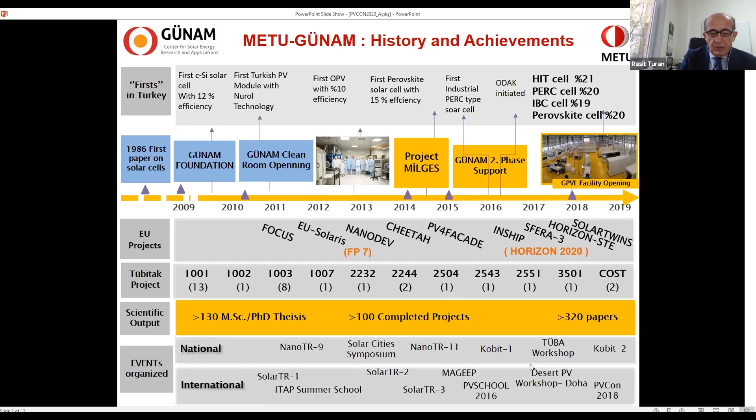And we have now come to a new stage, which we call new GUNAM. A new status has now been authorized to us under the law number 6550. Now GUNAM has been recognized as the Turkish National Center on Solar Energy Technology. This is a kind of recognition by the state.

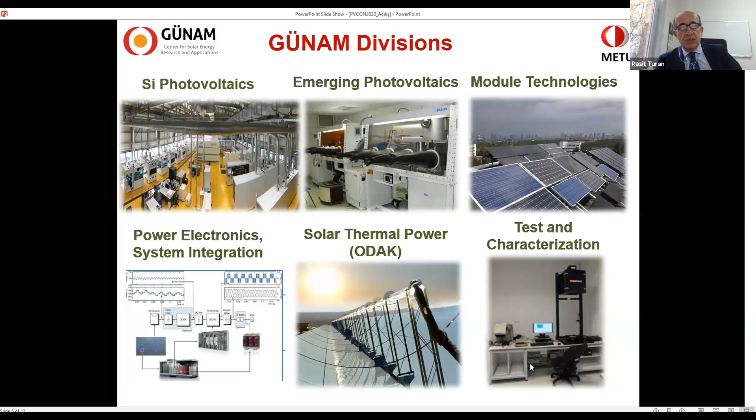Okay, here are some pictures from our divisions. Silicon photovoltaics is maybe the strongest one, with the highest number of people working and the largest infrastructure. And also emerging photovoltaics is a very productive unit in our center. Module technologies is starting now. Actually, we have a very good outdoor test platform under this group. The power electronics group is also starting up with equipped laboratories and also people. And solar thermal power is operating together with the mechanical engineering department of the university, and we have a strong test and characterization unit.

Okay, we will have 2 major buildings, 2 major facilities. One of them will be in the so-called METU Research Park building. Here we will have a new clean room with 500 square meters of active laboratory space. And this part will be connected to the other research centers at METU.

The other one is a unique R&D based structure, which is a kind of pilot scale production line. This facility is fully operational now. We can fabricate all standard silicon solar cells, including PERC, aluminum BSF, bifacial, IBC, etc. So this facility is open to industrial research.

Another very important initiative we have taken very recently is to set up a new platform in Turkey, which is called Turkish Photovoltaic Technologies Platform. This platform will be supported by the government, by TUBITAK, which is the major funding agency in Turkey. In this platform, we will have industry as well as some other universities.

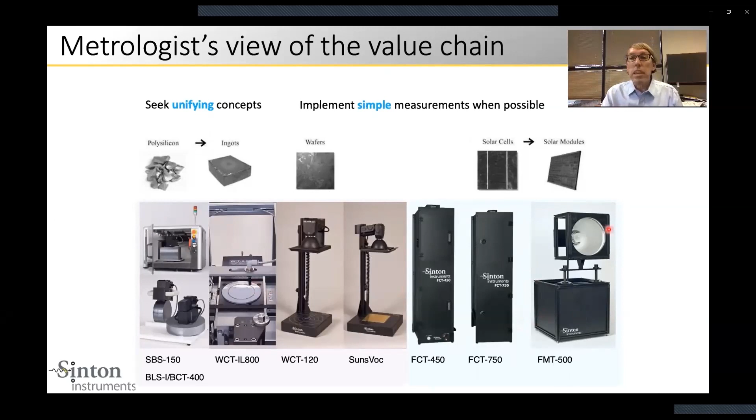In the beginning of the process, you can qualify your material for material quality, for purity, for crystalline quality. During the process, you can monitor your wafer lifetime to see if you've had a contamination event, or to optimize your passivations and make sure that process control is under control. At IV test, you can measure the entire characteristic of the solar cell and basically know what your process control was in the line after all of the high temperature steps. And then we have module testers as well that can qualify the modules right before they're sold.

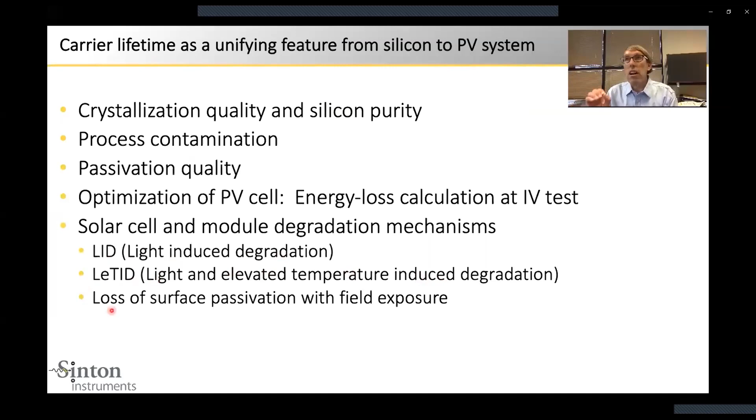So carrier lifetime is a unifying feature in the PV value chain all the way from beginning to end. In addition to these features, at the IV test, you can do energy loss calculations and figure out how to re-optimize your solar cell design or process. I'm going to talk a little bit about solar cell and module degradation mechanisms because lifetime is a very good way to study these as well. There are three main ones: LID, light-induced degradation, which is boron-oxygen pairs; LETID, light and elevated temperature-induced degradation; and then the loss of surface passivation with field exposure.

So first, we'll talk about lifetime from first principles. What we're talking about is the lifetime of an excess electron hole pair in silicon. And this is usually determined using the continuity equation, which was in even the first textbooks on semiconductors by Shockley. And the lifetime of the electron hole pair is equal to the carrier density in the wafer divided by the photo generation minus the carrier density as it changes with time. In the steady state, it's just the carriers per unit photo generation, and this is what it would be in a cell or a module being used.

And in a lifetime test under transient conditions, it's the carrier density over the change with respect to time of the carrier density. So what we can see from this equation is that what you need to measure to determine lifetime is the carrier density as a function of time. And you can do this with a number of sensors, and people do. One of our favorites is the eddy current sensing of conductance, and then you convert to carrier density using mobility.

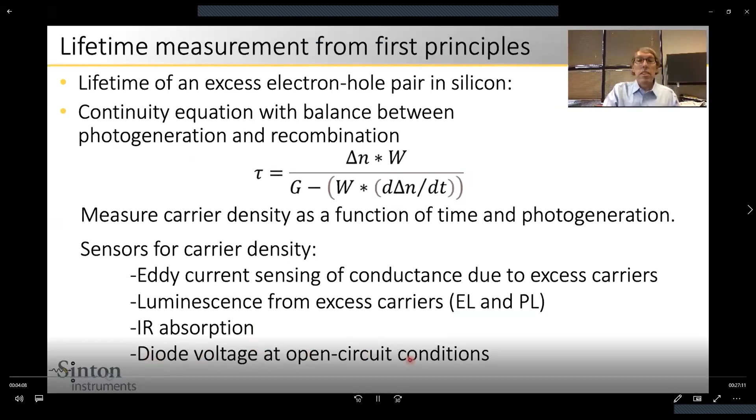You can use luminescence from excess carriers, EL and PL, and this is just looking at the NP product in the cell. IR absorption, the free carrier absorption of free carriers, tells you how many there are in the cell. And finally, after IV test, you can use the diode voltage under open circuit conditions. In this talk, we'll be talking mostly about eddy current sensing of conductance and using the diode voltage.

Now, the first and the most common application for lifetime testing is in the process line optimizing the bulk lifetime and the surface passivation. And this is often done with a wafer that has surface passivation on the front and the rear. It's measured on a lifetime tester. And when you take 1 over the measured lifetime, you can separate that into 1 over the bulk lifetime plus the J0 with a constant, which depends on the carrier density delta N, the excess carrier density.

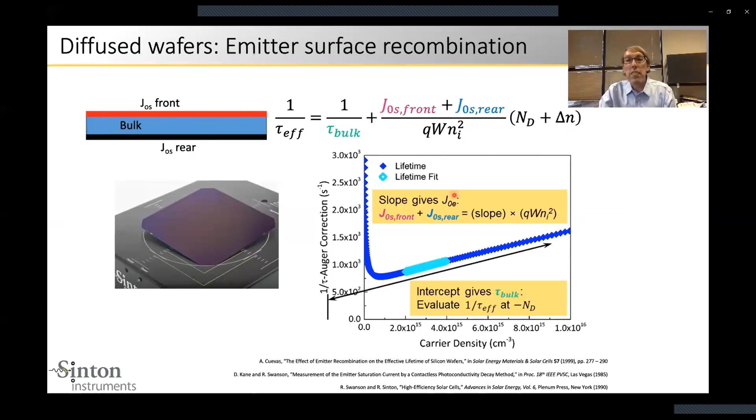So this is the slope. If you take the slope and correct by a constant, that gives you the J0 of the surface, and the intercept at the negative doping gives you the bulk lifetime. This is an analysis that you can do on most N-type wafers, especially undoped or lightly doped N-type wafers, and it's the most common application of lifetime testing.

Now, just to generalize this a little, you can do the lifetime versus injection level as a function of temperature. And this gives you access to much more fundamental parameters. There's a lot of research, especially in the last 20 years or so, with actually identifying the trap level and the ratio of capture cross sections in order to get a fingerprint for various defects like iron or chromium in silicon, boron oxygen defect, and these other things. And by using temperature, you can get a much less ambiguous determination of these parameters.

And I'm not going to go into detail of this. It's better done by others, and if you want, I can give you references. But I will mention some of the applications for the degradation mechanisms, and I'll just use the LeTID in PERC structures as an example.

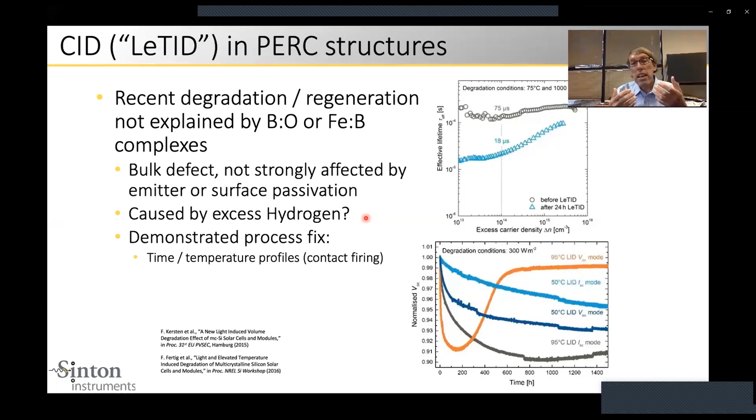And the leading hypothesis is that this is caused by excess hydrogen in the silicon, as well as some other aspects. And there's a demonstrated process fix for this, which is just to control your firing temperature, in order to get just the right amount of hydrogen in the silicon. And there are other tricks that can be done, but the way to qualify these tricks and understand them in a fundamental way is often done with lifetime testing.

So for the rest of the talk, I'm going to switch to determining the lifetime parameters at the IV stage, where you're using voltage as the sensor of carrier density. And so we're going to use a sample of 350 heterojunction cells in many of these slides to follow.

And here we have the IV curve, current versus voltage, and the blue curve is the IV curve. And from this curve, you can determine all of the usual things like efficiency, open circuit voltage, fill factor. You might also get a yield curve showing how tight your distribution is.

But we go a little farther than that with IV testing, and this is shown by the red curve, which is the Suns-Voc curve. And this is constructed by measuring the open circuit voltage as a function of light intensity, and then displaying it this way, where the distance between these two curves is the series resistance.

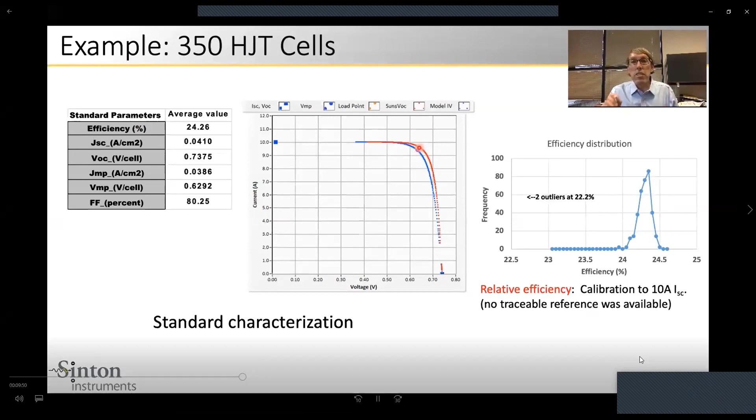So the Suns-Voc curve has all of the recombination aspects of the solar cell, but none of the series resistance. And so it's a good vehicle for really doing your fundamental device physics on your solar cell. And so using this Suns-Voc curve, you can report a whole bunch of other parameters. You can report, for example, pseudo-efficiency, pseudo-fill factor, the series resistance, as I showed you in the last slide, capacitance.

But you can also do this lifetime measurement, because it's the same as the eddy current lifetime measurement, except you're using voltage as your sensor. And so we have 1/tau versus carrier density, and you can determine the J0 of the surface independently from the bulk. And so you can report the J0 surface, the bulk lifetime.

And at IV test, you can also report the doping of the substrate, which is very important for the device physics. And surprisingly, you can even measure the thickness electronically from the data. And so you also get the lifetime as a function of carrier density over the entire range that's useful for IV curves. Now the end goal is to be able to make decisions.

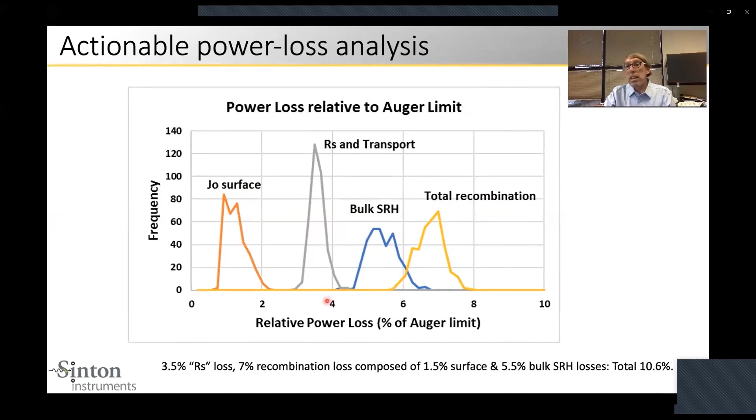And so what we do is we use all these parameters to do a power loss analysis. And I'll describe this in more detail later, but in this case, we can see that we have 7% loss in power relative to the Auger limit due to total recombination. And we can split that into bulk recombination, surface recombination, as well as report the series resistance very precisely.

So back to the beginning, I'm going to kind of tie all these things together, the lifetime and the IV curves. And to do that, I'll go back to what Dick Swanson taught me in his research group almost 40 years ago. And it's a very simple model that is very general and useful. I've found it to be extremely good.

And this is that at VOC, the photogeneration equals the recombination. And so you get your maximum carrier density at open circuit voltage because the solar cell basically fills up with carriers until the recombination balances that. And so I show that in a cartoon here where red is the solar cell filling up with carriers.

Now at the maximum power point, you don't want to recombine all your carriers. You want to collect about 95% of them. So you reduce the carrier density by pulling out terminal current until the carrier density is something like 5% of what it might be at open circuit. And that gives you the maximum power point. And then at short circuit current, you pull the electron hole pairs out just as fast as they're photogenerated, and you have close to a 0 carrier density.

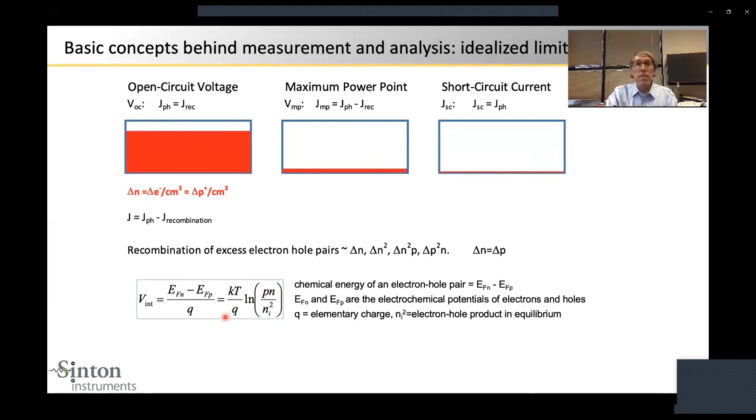Now the voltage is just given as kT over q times the log of the pn product. So what we can see here is that fundamentally the current is determined by carrier density, because the lost current, the recombination, is, and the voltage is determined by carrier density. So this is the basis for an IV curve. And so this is actually the equation for an IV curve, if you specialize in recombination anyway.

And we can see that the current out of your solar cell is the short circuit current minus any shunt current that you have, and then minus the recombination. And there are 3 recombination terms. We have the bulk recombination, the surface recombination, the J0S, and the Auger recombination.

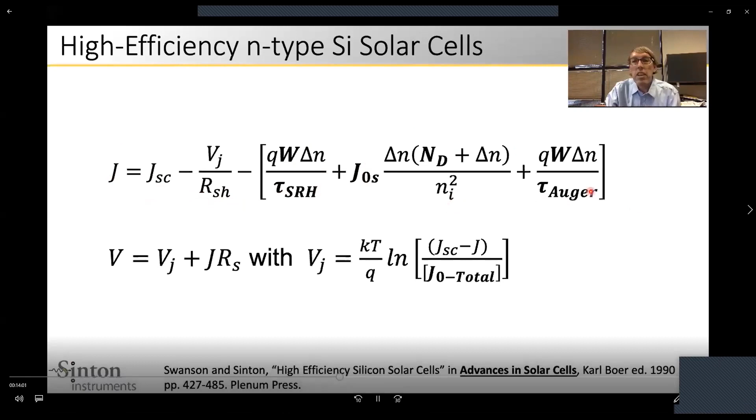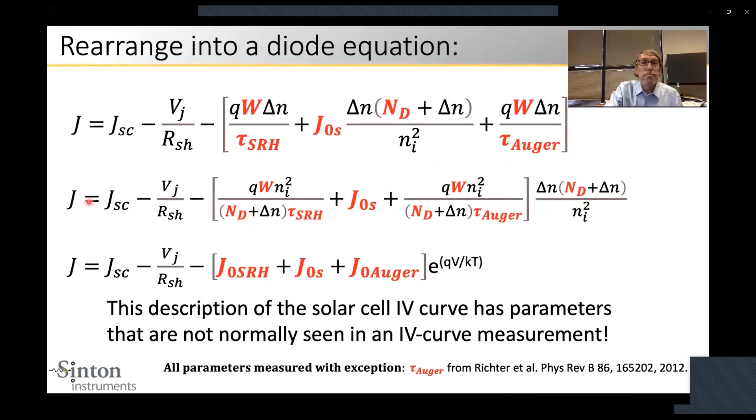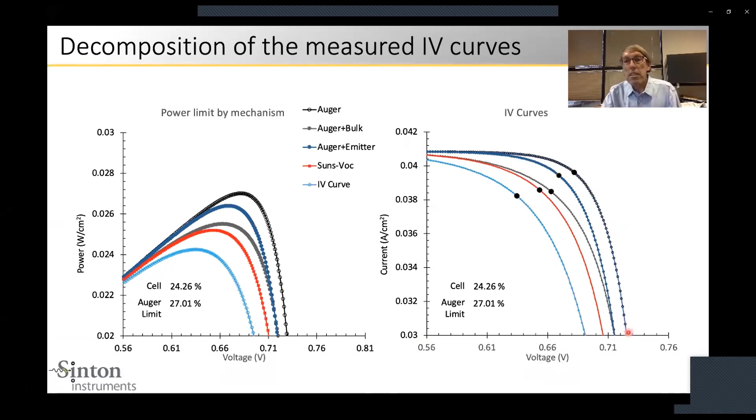Now, we can also take the Auger lifetime from the Richter study and plot the Auger IV curve here based on the measured JSC and the Auger lifetime. We know that from the Suns-Voc curve, we can do this extraction of the J0. So over here I'm on power curves, we can add the recombination from the J0 to the Auger recombination, and this gives us this curve, which is Auger plus emitter recombination.

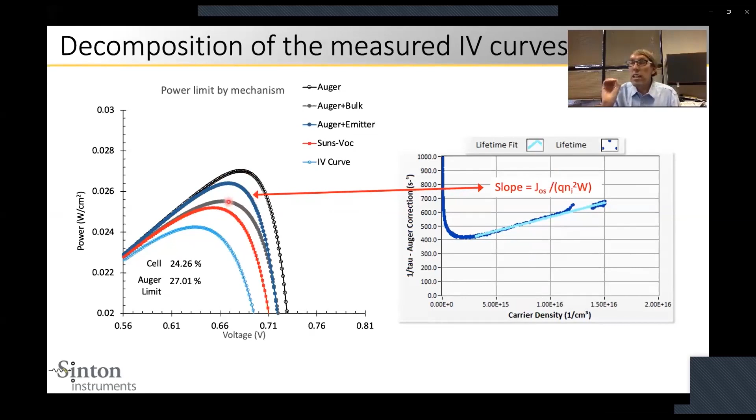And further, the Suns-Voc curve is the total J0, bulk, surface, and Auger, so we can subtract off this recombination from J0, and that will isolate the bulk recombination. So this gives us all that we have to use to get our first version of power loss analysis. And that's to look at the power lost at the operating point, the pseudo VMP, as you go from the Suns-Voc curve to the Auger limit.

And you can evaluate exactly how much current is lost due to bulk recombination, how much is lost due to emitter recombination, and then you know which you should work on. And that's essentially on the IV curve, you're going from the current loss at your maximum power point up to the current on your Auger IV curve at the same pseudo VMP.

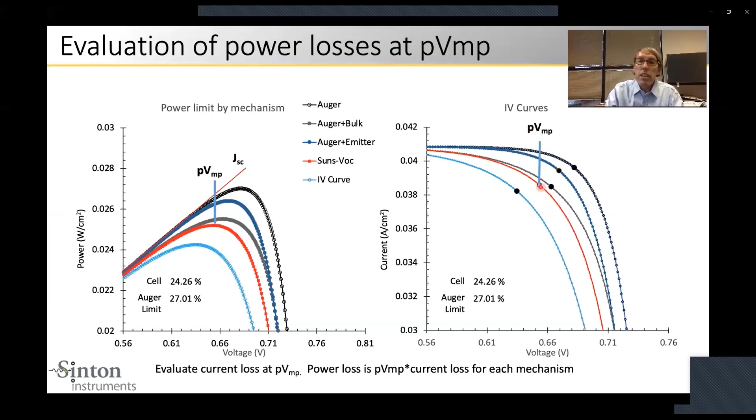And when you do this, this loss is linear in the J0. What I mean by that is if this is your cell under test at 22 femtoamps per centimeter square, which these cells were, then as you reduce the recombination up towards the Auger limit, you go up a straight line. And when you reach the Auger limit, you're actually at the Auger limit on the Auger power curve, but not at the maximum power point of that curve. You're still at the pseudo maximum power voltage of the cell that you tested. And so this is linear recombination loss when you evaluate the power loss at a constant voltage, the VMP.

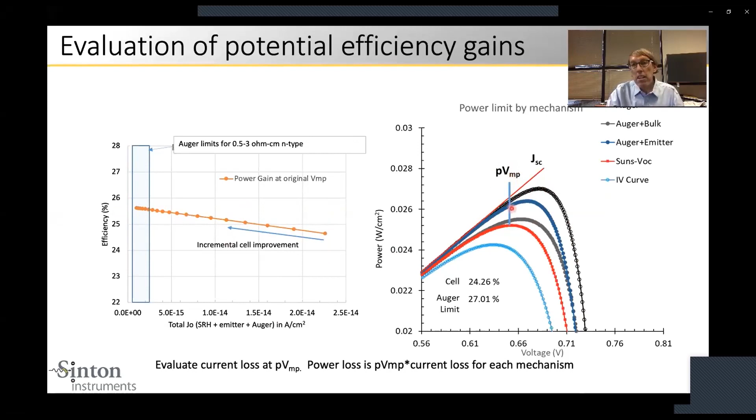Now we can do better than that. We can evaluate this power loss right up the gradient of maximum increase to the Auger limit at the maximum power point of the Auger limit. And we'll do that up this gradient slope that I show here. I chose an easy one, which is 96% of JSC, because it nominally goes through the maximum power points, because these maximum power points are all flat, and it's very easy to evaluate the equations up this line. And it's shown here. This is very close to the maximum power point on all of the equations.

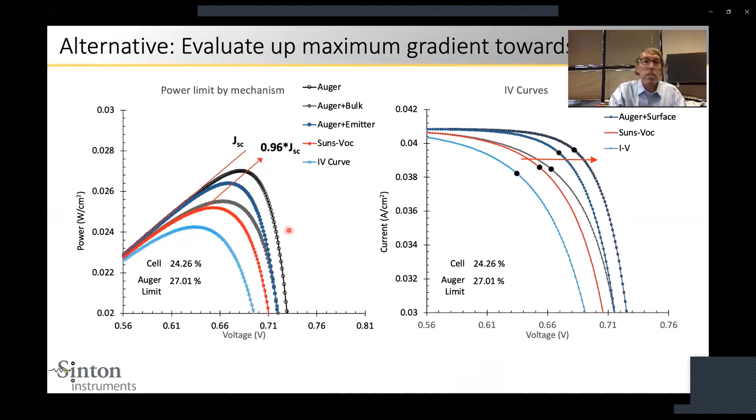Now, why I chose that is that the power in an IV curve is just the current times the voltage at that point in the curve. And on this constant 96% JSC point, J is 96% of JSC, and the voltage is just kT over q times the log of the other 4% over the total J0. And so if we look at how this varies with total J0, we find that you go up this blue curve and you go smoothly up to the Auger limit at the maximum power point on the Auger power curve.

And this is very nonlinear. And what I mean by that, I'll give with an example. If you start with your cell under test at 22 femtoamps per centimeter square, and you reduce your recombination by 2 femtoamps, you get a modest improvement in efficiency as you go up the lines which coincide here. But if you were to do the same 2 femtoamp reduction when you're approaching the Auger limit, you get a very dramatically larger increase in the efficiency. And so it matters the order in which you reduce your various recombination mechanisms. It's very nonlinear.

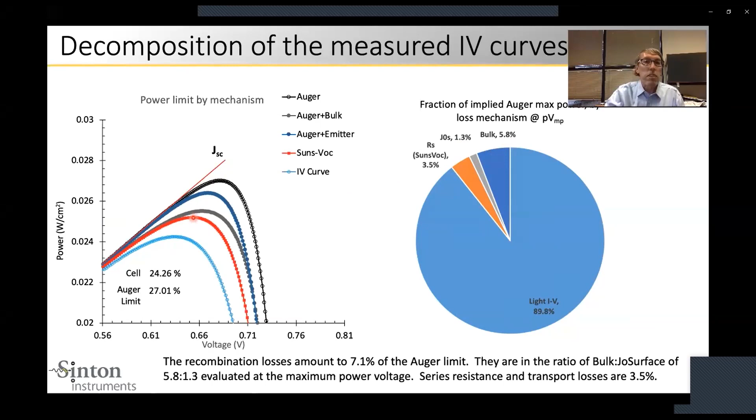And so we give those slices those numbers. And then finally, the last 3.5% takes you from the Suns-Voc curve down to the IV curve. And this is 3.5%. And this is the series resistance and the transport losses, where the recombination losses were from Suns-Voc up to the Auger limit.

So that brings us to our power loss analysis. And if you take all 350 cells, you can see the distribution of total recombination, the distribution of bulk Shockley-Read-Hall loss. And for the J0, you see that it's steep towards the minimum, and that's the perfect implementation. And then it has a tail, which is process control variation. The RS here is very tight.

And so how would you use this to make a decision if you were an engineer? Well, you have to realize that 350 cells is only 5 minutes of production data. At line speed, you'd have 86,000 cells in one day. So you could do the power loss analysis for a high bin and a low bin and see what the different losses are between those two.

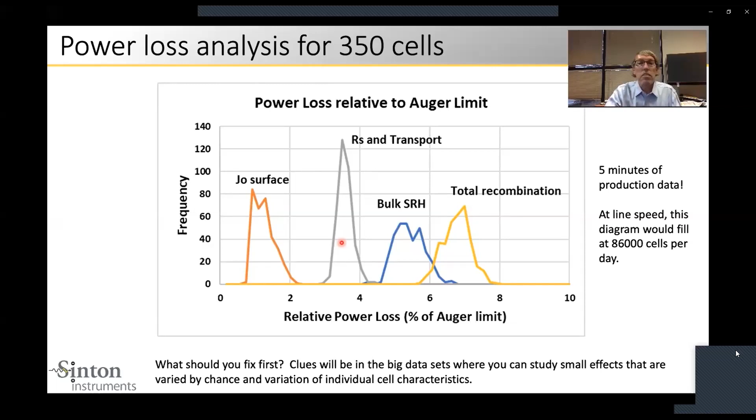Or you could find the 10,000 heaviest doped cells and compare them to the 10,000 lightest doped substrates and do those kinds of things. So when you get big data, you have all sorts of unintended experiments that you can really data mine with these techniques to find out how to optimize your process and your cell design.

So the limitations of this analysis at IV test are that we've evaluated resistance and recombination losses. We're basically assuming that JSC is a full characterization of photo generation. So if you want to do an experiment on your AR coating, you need to do a split and put it through with 2 different kinds of cells. And for the Auger limit, we're using the measured JSC.

Now, it's interesting to compare our power loss analysis with some of the others that we see in the literature. And I'm going to do a rough comparison in the next few slides to the SEGA analysis from ISFH. And as a reference, I'll use the paper by Brendel in 2016. And what they're doing is they do a model. In this case, it's with Quokka. And they have their parameters that fit the experimental cell.

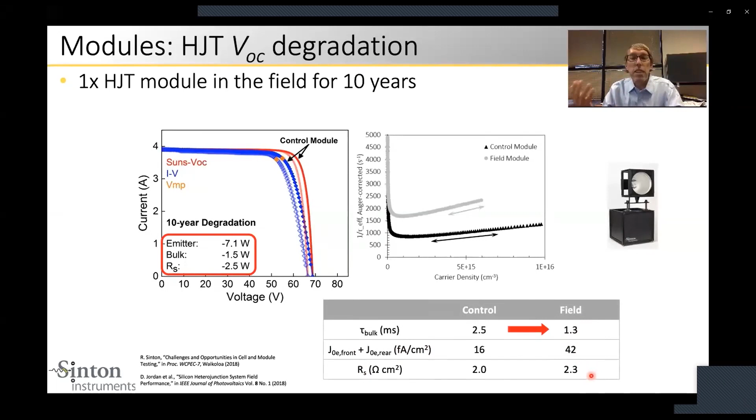And you can also do this at the field level. And this is actually my array. You can do a Suns-Voc plot just by monitoring voltage as the sun comes up in the morning or goes down in the evening. This gives the part of the curve near maximum power. And then in the middle of the day, you get the voltage at one sun, 1,000 watts per meter square. And then if you turn on the maximum power tracker, you get the maximum power point so that you can evaluate the series resistance. So we have everything you need here.

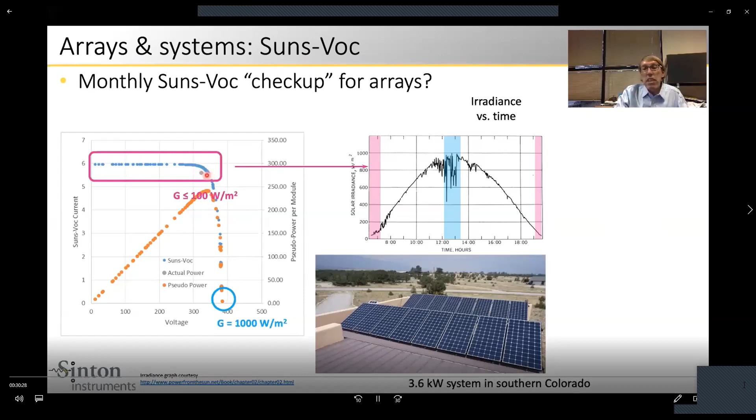And it's interesting that the critical part of the Suns-Voc curve actually comes between dark and 10% of the sun. So this is the perfect illumination for getting the maximum power point on a Suns-Voc curve. So in conclusion, lifetime is extremely useful, all the way from the crystallization to the system. And it is a unifying factor in understanding every aspect of the solar cell device physics. It's been useful for more than 35 years, and we anticipate that it will be useful for 35 more years.

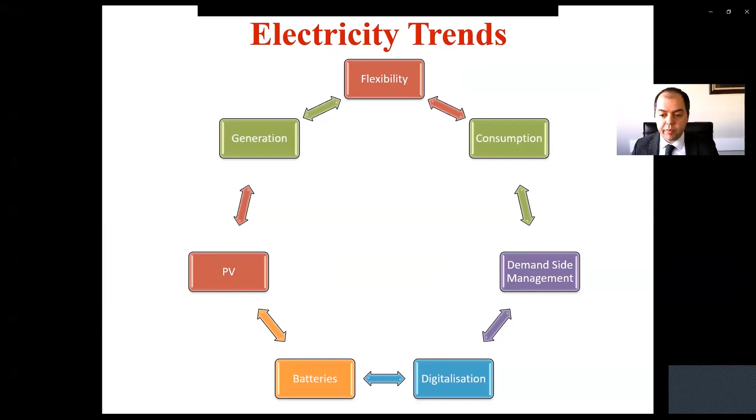All these trends have been proven within the pandemic times we are in. At this point, the International Energy Agency, which announced World Energy Outlook 2020 some days ago, mentions that the huge disruption caused by the coronavirus crisis has highlighted how much modern societies rely on electricity. So the reliance on electricity can be revealed as a result of the obligatory pattern changes that decreased or increased the demand.

The lessons learned from the pandemic times are listed in this slide and are directly related to today's subject. Hence, nowadays we comprehended the importance of the global trends I have mentioned and the increase in social acceptance for the new transition periods. Consequently, the world is now more ready and less resistant to the digitalized world than in early 2020. That means a more electrified world.

By analyzing the data of 2020, World Energy Outlook 2020 mentions that there is a 5% drop in energy demand this year, a drop in energy-related CO2 emissions by 7%, and in energy investments by 18%. However, the impacts vary by fuel. The estimated falls of 8% in oil demand, 3% in natural gas demand, and 7% in coal use stand in sharp contrast to a slight rise in the contribution of renewables.

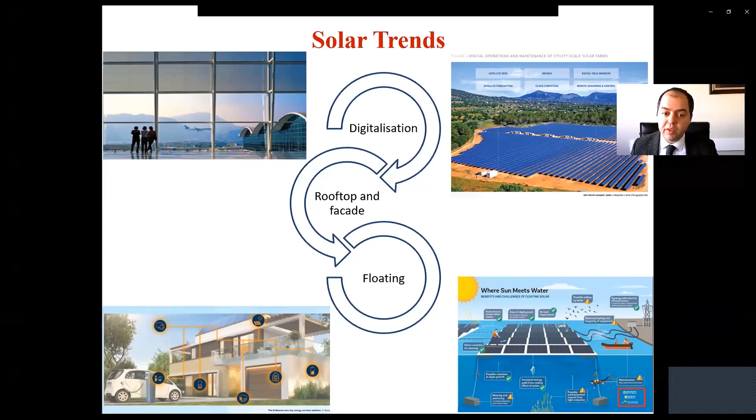So on the generation side, Atatürk generation capacity is 8.1 terawatt hours per year. That means 1 gigawatt of system generates around 3.4 terawatt hours. So it's twofold of photovoltaic systems. That means we just need 6% of reservoir size to have the same generation. So it shows the advantages of floating photovoltaics. So we easily see that in the coming period we will be using these floating, rooftop and facades and digitalization works a lot.

Coming to Turkey from the global aspect, Turkey's energy sector has been driven by four major characteristics. These are growing energy demand because of the population and welfare increase, and import dependency. Turkey's natural gas demand in 2019 was 45 bcm and 99% of this demand was imported. It's also the same for oil, 91% of oil was imported as well. On the other hand, in order to solve this challenge, Turkey has huge renewable sources from hydro to wind to solar to geothermal.

Furthermore, Turkey is also directly connected to the world, starting from Europe. That means all the infrastructure, the technical activities and the legislation should be in compliance with Europe and the world as well. So with these drivers, Turkey has had its own circumstantial energy transition phases. In the first phase, between 2001 and 2016, Turkey introduced radical reforms and restructuring in the energy sector.

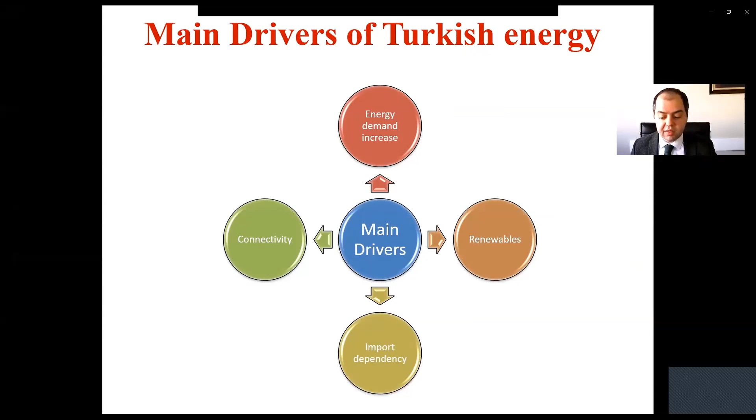In the second phase, starting from 2017, which is mainly inspired by the national energy and mining policy strategy, there are three pillars. These three pillars are reinforcement of security of supply, localization to renewables and domestic sources, and enhancement of predictability in the market. So all the policies after 2017 are affected by these three pillars, and they serve these three pillars. So maximum utilization of photovoltaics is also one of the main objectives cross-cutting these pillars.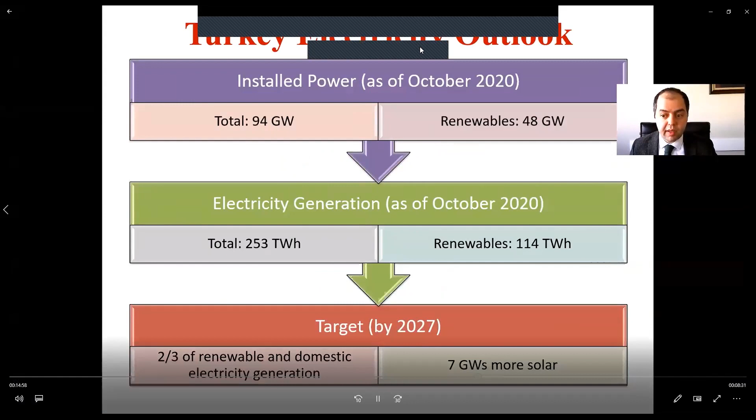Once we check the Turkish electricity outlook with main parameters, Turkey has got 94 gigawatts of cumulative installed power, and more than half of it is from renewables. If we divide this renewable source into the sources, we have 30 gigawatts of hydro, 8.3 gigawatts of wind, 6.45 gigawatts of solar, 1.6 gigawatts of geothermal, and 1.4 gigawatts of biomass.

For the generation side, the generation of 2019 was 304 terawatt hours, and as of the end of October, this year's generation is 253 terawatt hours. So it shows that at the end of the year, we will have similar amounts to what we generated in 2019. 45% of this year's generation is from renewables, and it increases day by day.

Some days ago, the minister announced that for the first 9 months of 2020, 98% of the energy investments in Turkey are from renewables. That means that in the coming period, we will be seeing more renewables than conventionals.

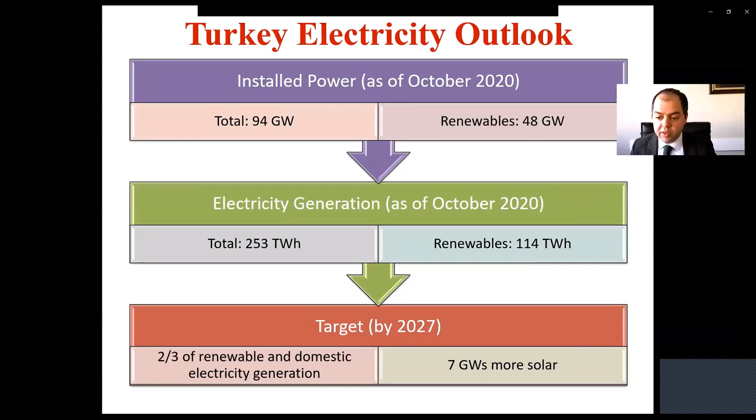The country's targets for 2027 are these. The first one is to have two-thirds share of its generation from renewables and domestic sources. The second one is having 8 gigawatts more wind by 2027. And the third one is having 7 gigawatts more solar by 2027.

Testing the Turkish PV market dynamics: three main models to develop the market are the ground-mounted utility-scale investment, as is applied in the majority now, the promising rooftop and facades, and the sui generis feed-in premium model, namely renewable zone tenders. Almost all the currently installed power is ground-mounted power plants, whose installed power varies around 1 megawatt.

Till last year, the legislation said that if you are going to install the system for self-consumption and the installed power is lower than 1 megawatt, then you are exempt from licensing. If not, then you need to have a license. That's why the majority of the power plants in Turkey have installed power around 1 megawatt. This 1 megawatt threshold was increased to 5 megawatts with the presidential decree in 2019.

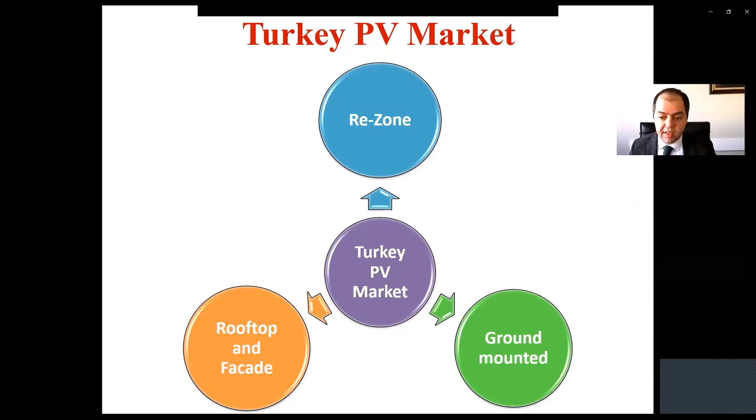For the next period, we see that the trend is for rooftop photovoltaics. There are many applications from consumers and industrial activities to install photovoltaics on their roofs.

At the end of the day, we have 6.45 gigawatts of installed photovoltaic power as of 2020. This corresponds to around 7% of the total installed power of Turkey, which was 94 gigawatts. The generation till the end of October 2020 is around 10 terawatt hours, and it's 4% of the country's total generation.

Like I said, the recent years' accelerating effect is from the sui generis model, the renewable zone tenders. We have had 2 for wind and 1 for solar until now. They are all successfully completed tenders. And the next one will be solar PV at the beginning of next year.

As a part and requisite of the renewable zone tender for solar in 2017, a solar PV module manufacturing facility, the first and only integrated manufacturing facility in Europe and the Middle East, became operational in Ankara as of August 2020. Hence, this facility is now able to manufacture PV modules starting from the raw materials and covering full manufacturing steps such as ingot, wafer, cell, and module production.

The rules of the next renewable zone tender for solar have been announced. With a total of 1 gigawatt of installed capacity, we will be holding 74 competitions in 36 provinces with capacities between 10 and 20 megawatts. For the first one, the government declared the location and had one tender for 1 gigawatt, with requisites like installation of a manufacturing facility and establishment of an R&D center. But for the second one, the government is applying 74 competitions. That's why this tendering period is called the mini renewable zone tendering period.

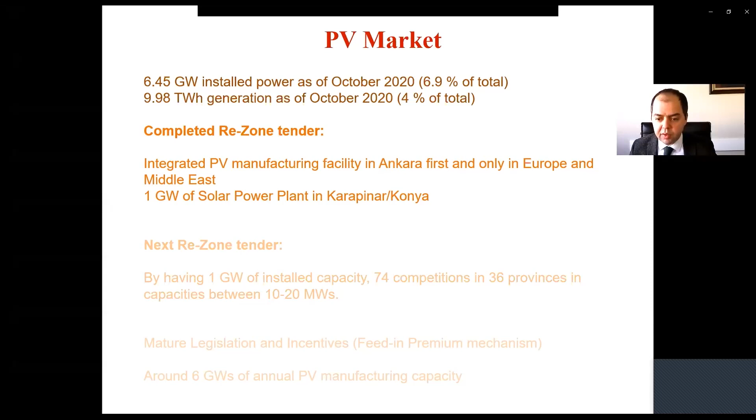Last but not least, as a department I have been heading, we developed a strategic framework covering all the world trends, country priorities and skills in order to channelize project programming processes for the international funds, because our department is responsible to develop projects and to find the appropriate funds from international organizations.

So the strategic priorities of our framework are low carbon solutions in the energy system, connectivity and integration of the energy sector, and technology transfer and development in this sector. The technical priorities are digitalization in the distribution scale and smart and green infrastructure in the big scale like transmission. So photovoltaics is at the heart of this strategic framework, since it's also in my heart.

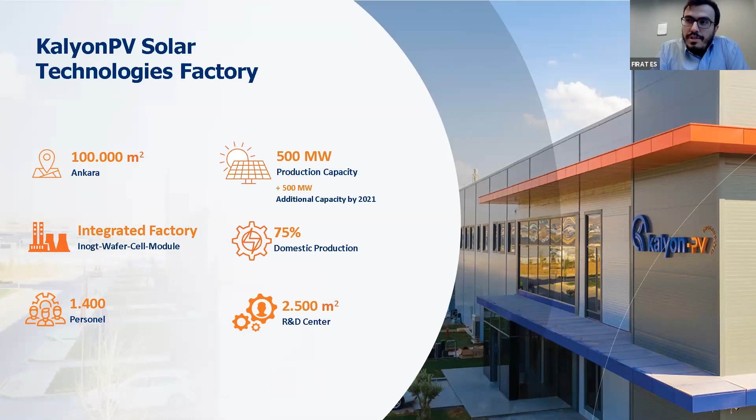And this allows us to produce our cells or modules with a 75% domestic locality ratio. So it supports domestic production, and we are continuously trying to enhance this ratio. We have 1,400 personnel right now, and with the extension, we will be reaching 2,100 personnel. And under the same roof, we also have an R&D center of 2,500 square meters, where we are going to develop our technology to supply technology to our factory.

And I can say production started in August 2020. So we are a new factory. In fact, the module factory ramped up quickly. Now it's close to full production. The ingot factory is also close to full production capacity right now. Wafer and cell factories are around 75% production capacity, and by the end of 2020, we are planning to reach full capacity production, 500 megawatt production.

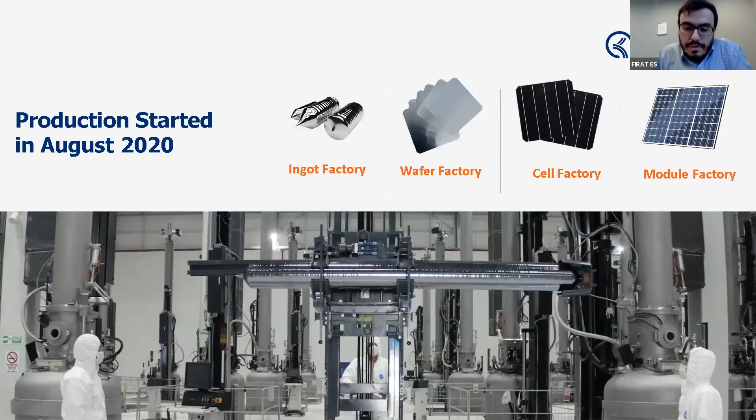And all cells that start from ingot are laminated and modules are made, and they are sent to Karapınar. And in Karapınar, we also started to sell electricity with a small volume. And a little about our technology. We have the ingot factory. We have 72 pullers in our factory, and we have more than 500 megawatts of capacity.

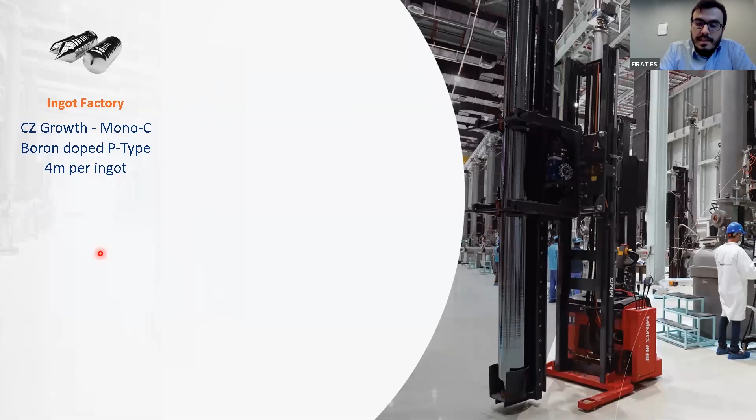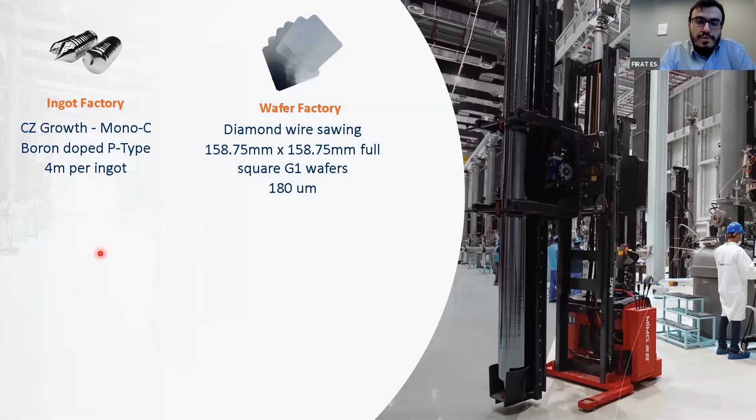And we are using a Czochralski growth method to grow our monocrystalline ingots. The ingots are boron doped P-type, and each of them are around 4 meters long and around 350 to 400 kilograms. And in our wafer factory, we are using diamond wire sawing, and we are using G1 standard 158.75 millimeter full square wafers, and our wafer thickness is 180 microns.

In our cell factory, we are using mono PERC technology with bifacial property, so both sides are contacted with fingers. Our starting efficiency target was 21.8, but now within such a small time, we reached 22% average efficiency from our production line, and some efficiencies up to 22.5 are being reached on the other side of the limit. And our cells give 70% bifaciality.

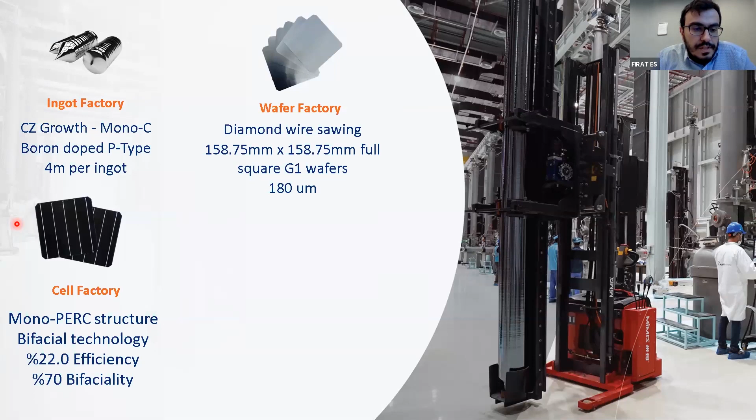And in our module factory, we use our cells to produce modules. We are using 72 half-cut cells, so 144 half-cut pieces are used. That helps to reduce the high current due to this large sample area, and cell to module losses are decreased. We are using glass-glass frameless bifacial modules, so we can use electricity coming from the albedo, and our module power average is 400 watts right now, and our bifaciality is greater than 70% for our modules.

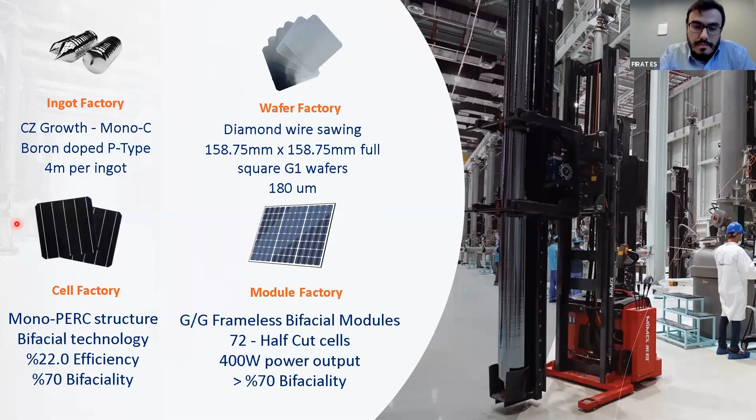And when we come to our research and development department, we were legally established on the 1st of September 2020, but until that time we had been in a preparation period. Due to COVID, we had some stops, but we tried to do as much as we can. As I said, we have a 2,500 square meter R&D closed area with offices, one test and characterization laboratory and one clean room. The clean room is being established right now, and for the test laboratory we are starting to purchase our tools.

And our team has an average age of 29, which is young and very enthusiastic about developing new technologies. When you see the education level, you can see that 60% have bachelor degrees, 15% Master of Science degrees, and 10% PhDs are working with us, and we have 15% technicians in our laboratories and R&D centers. And this is the gender distribution: 35% female and 65% male researchers are working in our research center.

And we have 5-year R&D strategic plans as a portfolio of our R&D center. I will give some more details about them. The first is the cell and module efficiency improvement strategic plan, where we are working on cells, on device and materials optimization, and on modules, on BOM development and CTM optimization to increase the efficiency of our cells and modules and decrease the costs. Another 5-year R&D strategic plan of our R&D center is semiconductor production process techniques. Here we are mainly focused on N-type technologies, especially IBC and TOPCon, and also on crystal growth techniques.

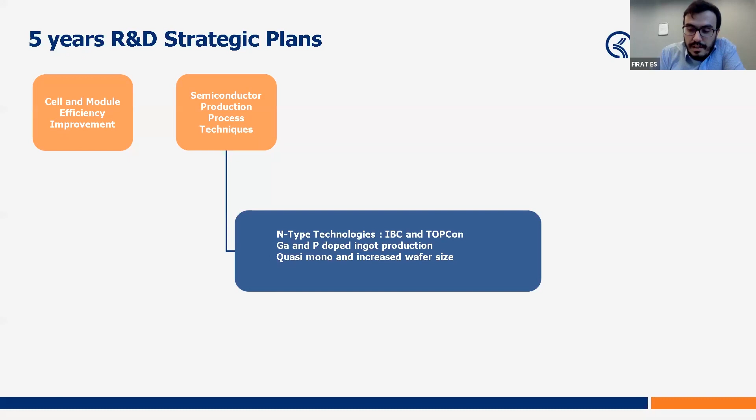We are working on quasi-mono and increased wafer sizes in our strategy, and decreased wafer thickness. Also, we will be working on gallium and phosphorus doped ingot production. Phosphorus doped goes to N-type technologies, and gallium doped will be helping to reduce light induced degradation of our P-type solar cells.

We are also working on automation and Industry 4.0. In this concept, we are mainly interested in the smart factory concept, and we have an MES system, and we are trying to adapt the physical wafer tracking to this system, just to get as much data from each wafer as possible. And also we are interested in artificial intelligence and machine learning on process development. We believe that these techniques are going to take over in time.

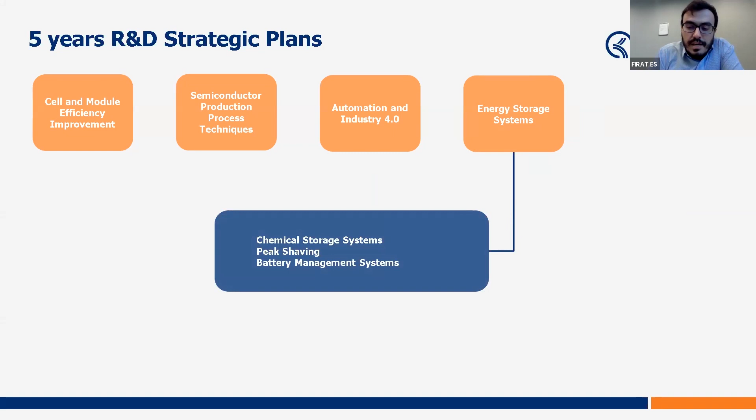And also we are very much interested in the flexible factory concept, where you can produce P-type and N-type solar cells under the same equipment structure. We are also working on energy storage systems. We are especially working on chemical storage systems, and the main idea is peak shaving, and battery management systems are to be studied in our R&D center.

And lastly, energy production and advanced characterization. Here we are mainly focused on life cycle energy yield assessments of industrial modules, or the modules that are the outcome of our R&D projects, and also levelized cost of electricity calculation, advanced characterization of PV devices, and floatovoltaics and agrovoltaics are mainly in our energy production and advanced characterization research program.

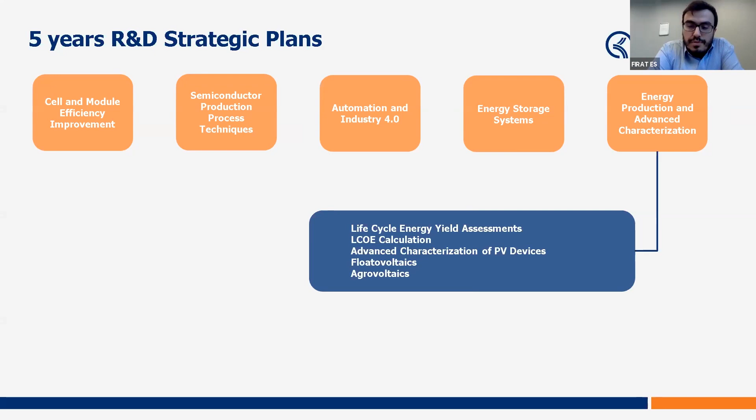I will give some examples of the projects that are going on right now, not all of them, but some highlights. First one is FlexFab2, that we are working on together with ISC Konstanz, RCT Solutions, and VDMA. Here we are working on, as I said, the flexible factory concept for P-type and N-type cell processing in the same factory. And we are working on N-type ingot growth, development of N-type IBC cells, decreasing the wafer thickness, and PERC cell development, both N-type and P-type.

In this project, we are an associated supporting partner to ISC Konstanz, and we are going to develop a factory model that can process P-type and N-type solar cells under the same roof.

Another research program is energy production projects that we are doing together with GÜNAM and Hasan Kalyoncu University. In the Ankara factory, on the ground, we are going to be testing different types of modules in our test site. Also on the Ankara factory rooftop, we are going to have a test facility to test rooftop modules, and also some rooftop tracking systems, which is really interesting.

Also in Karapınar, in order to see the harsh conditions there, we are going to have a test site. Even though Karapınar as a whole is a large test site, this will have a more controlled environment, especially the desert, and soiling is a very big problem there, and we are trying to solve it through cleaning robot development, but we are open to any suggestions from all researchers.

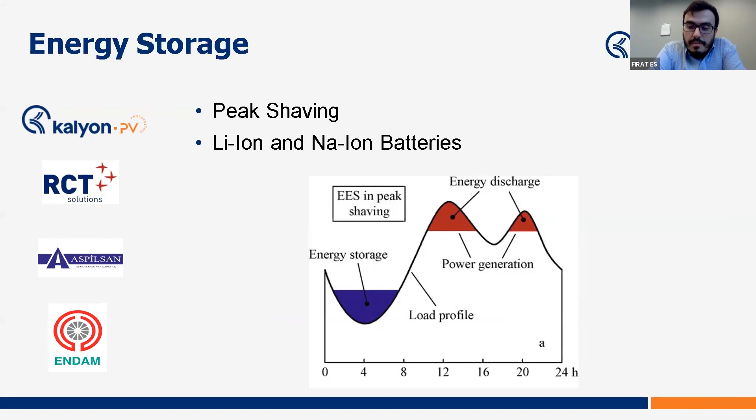And also, we are especially interested in lithium-ion and sodium-ion batteries, which can be possible candidates for such big utility scale battery systems. We are not only working on crystalline silicon, but we are also open to novel concepts. Around 20% of our budget is allocated for basic research and novel concepts.

We have a project on perovskite module development that just passed, having a lead-free and degradation-free nature. We will be working on module fabrication of these perovskite cells in an industrial environment, and we are going to try to increase the TRL level from 3 to 6 throughout this project for modulation and encapsulation of perovskite cells.

And in summary of our R&D center's projects, when we separate them by funding, we have 2 projects up to now funded by external funding, and 2 projects have been submitted to international agencies. And in terms of self-funding, we have 19 projects ongoing and 8 projects in preparation. When I say self-funding, it's completely funded by the company itself.

And when we take projects by team, I can say that we have 3 projects on novel technologies going on right now. We have 2 projects on localization. When I say localization, I mean developing the domestic market for raw materials or systems that can be sold in Turkey rather than purchasing the goods from abroad, because especially in times like this where you have international crises like Corona, we have seen that we must be as independent as possible to have this freedom in energy generation.